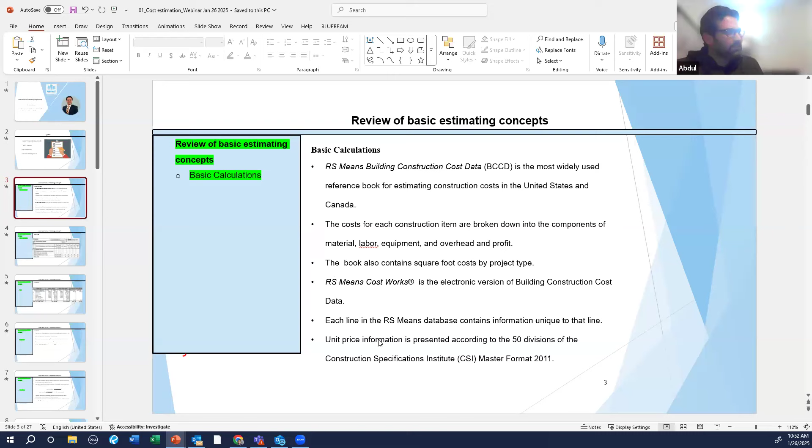All right, enough discussion on the references. So this is how it looks like. I have a reference picture, for example this is the concrete division. Concrete is mostly covered in Division 3 in the United States, so you see I have Division 3 up at the top. This is how RS Means looks like.

This column is called the crew, and I'll explain what a crew is in the next slide or so. This is the daily output, how much this crew can produce in one day - basically 15.62 cubic yards. If I use a crew C14A, it's going to give me 15.62 cubic yards per day. This is the labor hours, that's the unit, cubic yards.

That's the bare material, the minimum material per cubic yard. Bare material means you have the cost without any taxes, without any fringes or markups, just out of the shelf - like when you buy something in a grocery store, the shelf price is for example 10 rupees, but when you checkout and it adds sales tax, it costs you at least 12 rupees - those 2 rupees extra. So the bare cost is when there are no taxes, no markups, right off the shelf price. And the total price is after the markups, after the profit and everything.

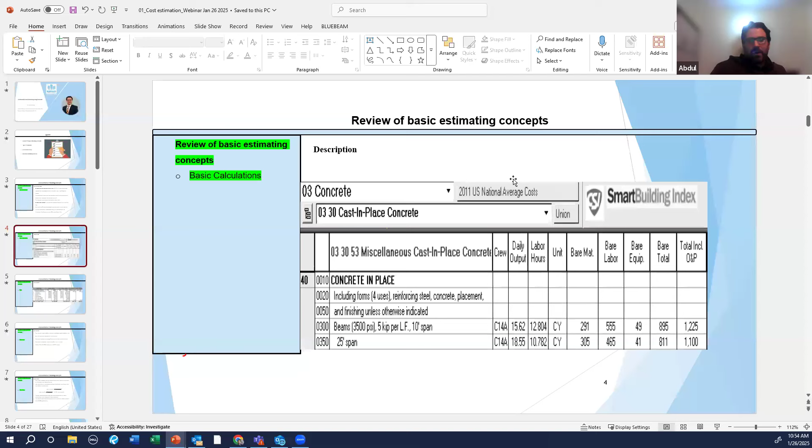Then this is the total cost including O&P. O&P means overhead cost and profit. So on every single item, the contractor is going to make profit from you, and that profit is sometimes in percentages - 10%, 15% - depending on what the contractor charges. But I just wanted to show you how RS Means looks like, this is just a picture.

So next slide, this is what I want to talk about. One of the most critical, one of the most difficult things to estimate in any cost estimation is the estimation of labor. It's not that easy, it's not straightforward. You have to do a lot of research, a lot of things before you can estimate how many hours a particular job would take. When we talk about construction labor hours, it's not the labor hour for one worker.

Usually there are a group of workers called the crew. So for example, if I have a concrete job that I have to do, miscellaneous concrete, pouring concrete somewhere, I'm not just gonna start estimating hours for one worker, then second worker, then third worker, then fourth worker. It doesn't work like that.

What that means is that if I have a concrete job, typically it would require a C14 crew. Every crew has its own combination of people. In this case, just for an example, the C14 crew has one carpenter foreman, 16 carpenters, then 4 rodmen, 2 laborers, 1 cement finisher, 1 equipment operator, 1 gas engine vibrator, and 1 concrete pump small.

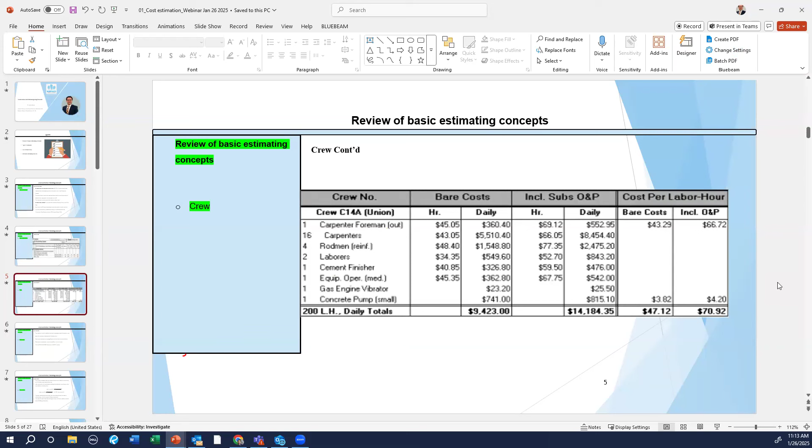Sharif, please go ahead. Yeah sir, my question - the duration, like 5 months, why do we need 5 months for this course? Most of the participants are engineers, they have the basic knowledge. So is the material itself 5 months worth?

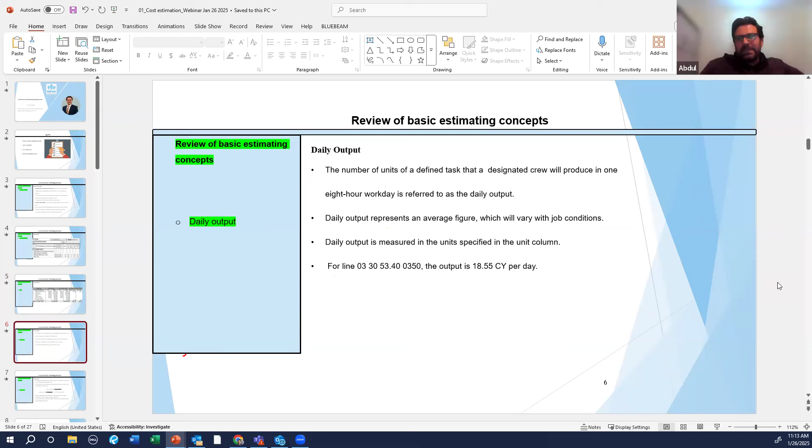Well, the material itself is a lot. Do you want to just scratch the surface, or go in depth of all the divisions? If you want to just scratch the surface, I can finish this course in 1 month, then you don't need 5 months. But one of you guys earlier asked me, are you going to cover MEP? If I have to do MEP, I have to literally teach the civil guys the mechanical and electrical systems before I can teach them estimation, right? Because it's not going to be easy for a civil guy to understand MEP estimation right away.

So I have to develop their foundation first. If I don't develop their foundation and just do the basics, it's not going to work - for example, I'm a civil engineer, I have a very strong background in civil engineering, but I am also a very, very good estimator of MEP divisions. But I did not learn it by just knowing the basics of MEP - I had to dig deep into MEP and learn it.

So if you want me to just scratch the surface, I can finish this course in 1 month, maybe less. But if we have to dig deep into estimation because you want to price the whole project - you don't just want to do parts and pieces, you want the whole project estimation - then it probably takes a long time. MEP alone would take me at least 2 months to bring a civil guy from a civil background into MEP estimation. So that's why, I guess, that's why.

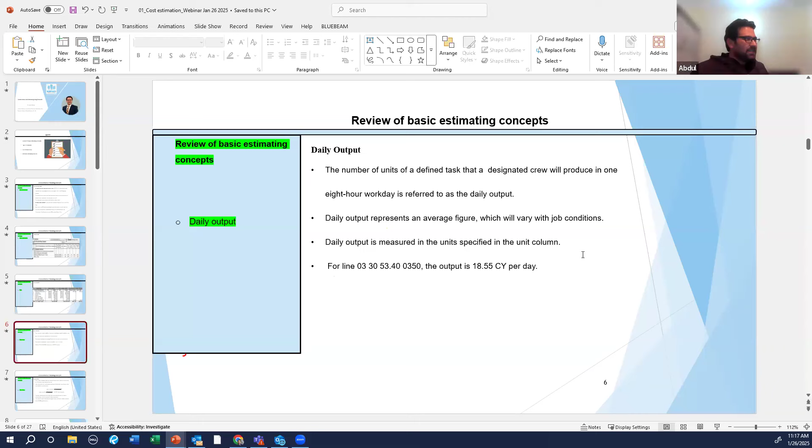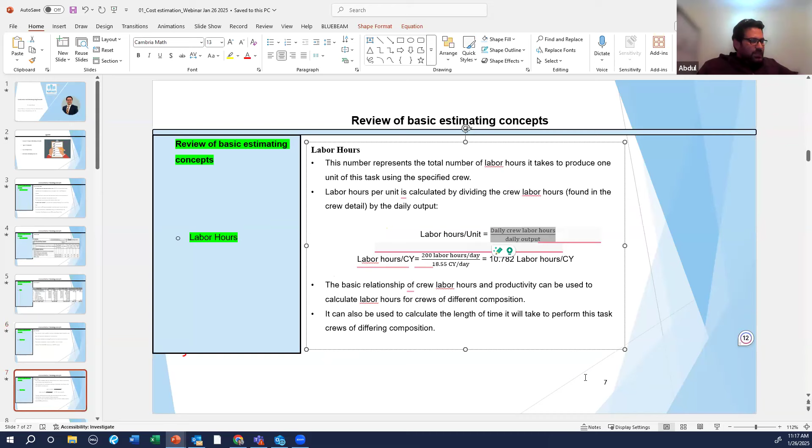And that's how you do the labor hours calculations. If you know the daily output, RS Means will tell you a rough daily output for a particular job. If you're doing miscellaneous concrete, cast in place concrete, or any type of concrete, it will tell you how much it will cost, how much it will produce per day. From there, you can basically calculate your number of hours per unit produced.

So this is a simple calculation. I can share the slides with you, but you can also download this from Google. I can share these slides. These are all simple calculations.

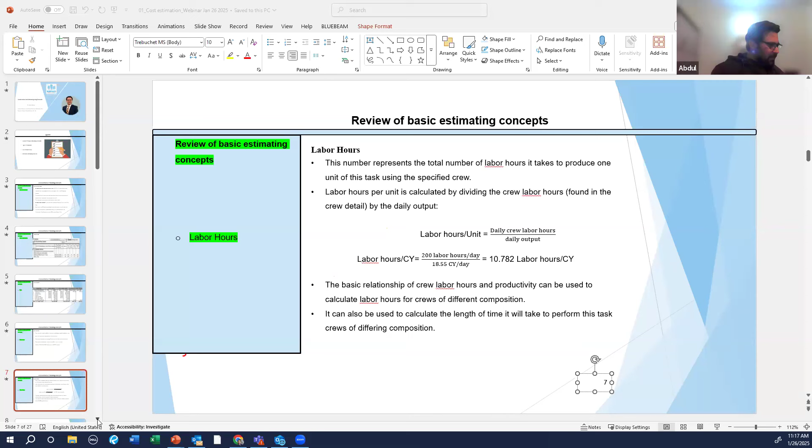Let's see next. All right, so the same example. Total overhead and profit. I think some of the slides we already talked about.

So we have the bare cost, which is any cost outside the markups. Markups are not included, sale taxes in case of material. In case of labor, no fringes, no benefits and all that. So those are all the bare costs. But when we add... Can we say the bare cost is the base price, the base cost?

So in case of material, what do you mean by base, by the way? Base is something that is fixed without profit. I have seen in some estimation, like for example, if you are doing PCC, they have written at the end in brackets 'base price'. Okay, yeah, it could be.

Yeah, it could be. The base price is basically the way I say it when I'm teaching is that it's the price on the shelf. So when you go to any grocery store and walk in, you see on the shelf it has a price on it. So you pick that up, right? For example, 20 rupees, 30 rupees. Then you gather all your shopping cart and take it to the checkout. When you do the checkout, it includes all the taxes and everything. So that shelf price is different than the checkout price, right?

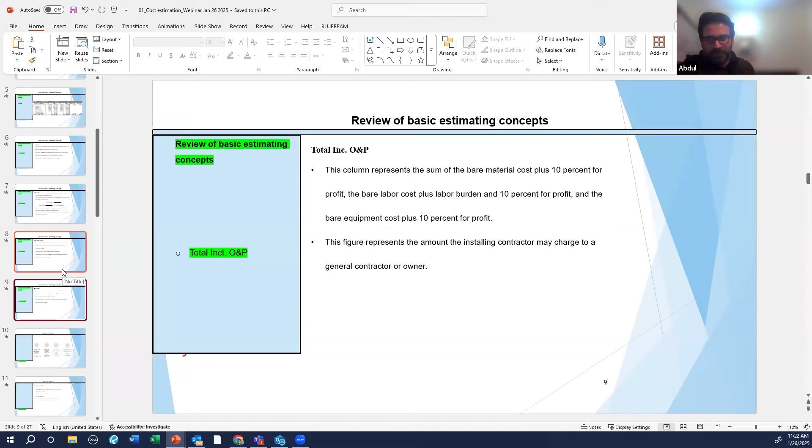All right, so I believe, Azam, this is the slide you wanted to see, right? The types of estimates, right? Yes sir, this is the right one. Typically the names might be different — these are the names we use in the United States industry, and I guess the names are similar elsewhere, but they might be slightly different from one another. That's why I've put an 'or' between those two statements, so at least you know one or the other.

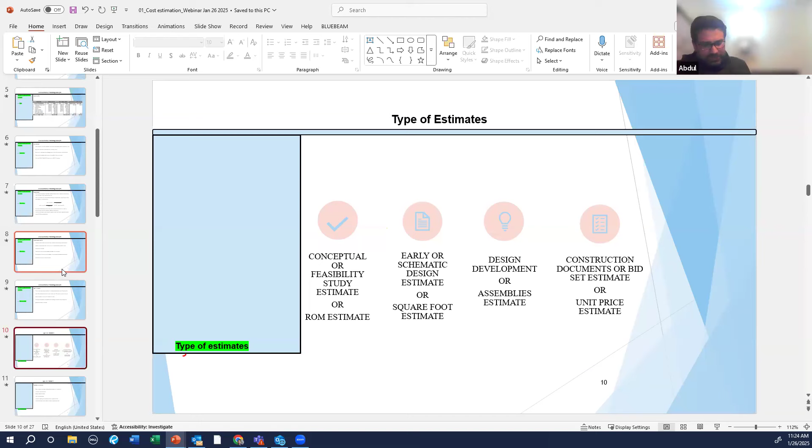So, conceptual or feasibility study estimate — that's the estimate used in a very, very early phase when we don't have a lot of information about the project. So we do an early phase estimate or feasibility study estimate. After that, once we pass the conceptual phase, the next steps are schematic, then design development, and then construction documents. I'll explain each one briefly so you know the difference between them.

When we talk about the conceptual estimate, that's the estimate where you have a lot of options. For example, you're trying to build a house. What's the first step? You're going to think about the community — which community should I buy a plot in first? Should I buy in DHA, should I buy in Bahria Town, or one of many other towns? So those are all your options, all your concepts. Then you say, okay, if I buy a plot in DHA it's going to cost me this much, if I buy in Bahria Town it's going to cost me this much, or if I buy in a third community, it's going to cost this much.

So at this point, the conceptual estimate, you don't have a lot of information. You're still figuring out where exactly you want to do the project and how. It doesn't necessarily have to be about location — it could be the same location, but you still don't know whether you want 5 stories, 2 stories, or 3. You're so divided, so confused at this point, but you want to do a project. That's where you do the conceptual estimate.

That's when you talk to a cost estimator, and with just the limited information he has, he doesn't know a lot, but he's reading your mind and writing down some statements, and based on that, he produces a rough estimate. That's why it's called a rough order of magnitude estimate, and that's why it's also called the feasibility estimate.

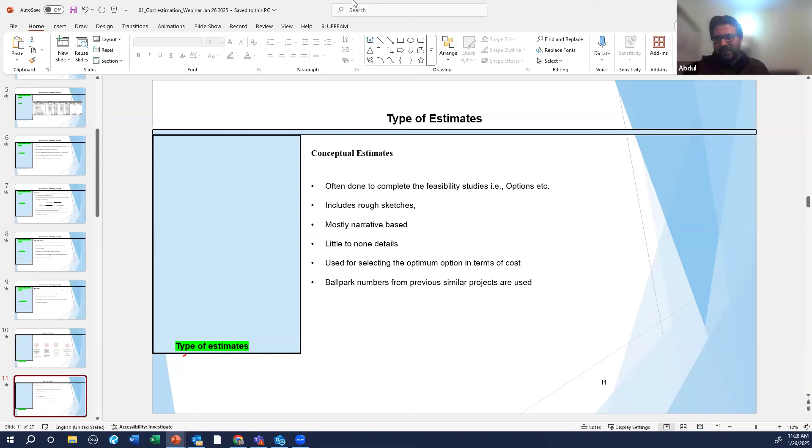So sometimes those ballpark numbers could be just one or two statements, because we don't have a lot of information. Based on your previous similar projects, you bring in that knowledge and produce your very, very early conceptual estimate.

This is a project I completed - a school project - when I talk about the different options. This was a client who came to me. I can't display the client information for copyright or privacy reasons, but this client told me he had three options. So the first option - this is an elementary school.

So that's one option, and he asked me to produce an estimate for it. Then he said, what if I divide it - do half of the renovation, not the entire building renovation. So you just do half of the renovation, and then for the other half, I'm building a new building right next to it.

So this is addition. When we are developing or building another building right next to an existing building, we call it the addition. Addition to an existing building.

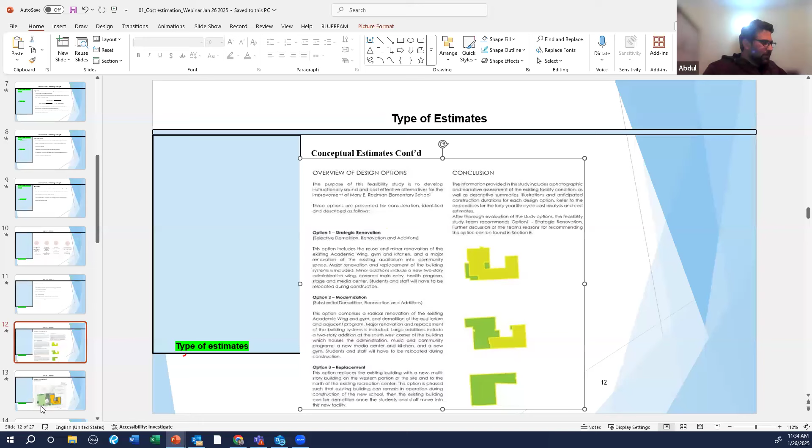All right, cool. So again, sometimes if the owner is kind enough, he'll probably give you rough sketches like this. He'll tell you, this is where I want to build the basketball court. Here's the name of the school. This is where I want to build the building pad. This is where I want the recessed play area, and so on.

So sometimes for a conceptual estimate, the owner might give you a sketch like this and ask you to estimate from it. But you got the idea of why conceptual estimates are equally important.

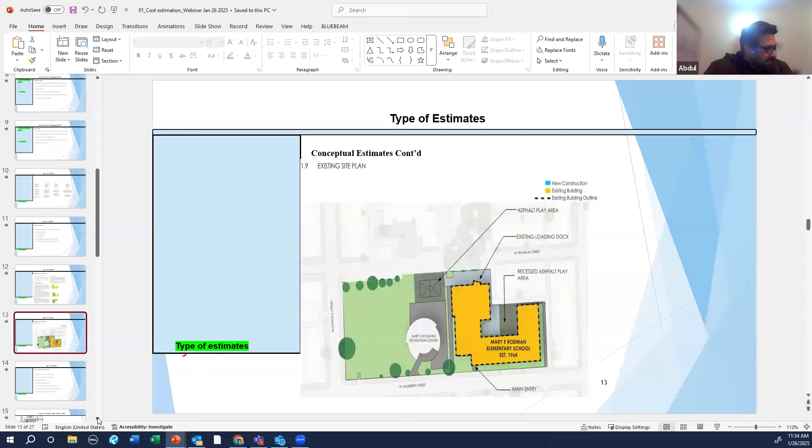Once you pass through the conceptual estimate, the feasibility estimate, or the decision-making estimate, the next step is the schematic design. Schematic design is where you have chosen your options. Remember, in the conceptual estimate we are looking for the best option for us. So that best option has already been chosen at this point. Now we are in the second phase.

In this schematic phase, the designer has already worked on the option the owner is pursuing. At this stage, the design is only 30 to 40% complete. And then the owner is asking you, can you give me another estimate? Now, why would it be important that the owner is asking for an estimate when the project is only 30 to 40% designed? Can anyone tell me why? Just like I talked to you about the importance of the conceptual estimate, what is the importance of the schematic design estimate at this stage?

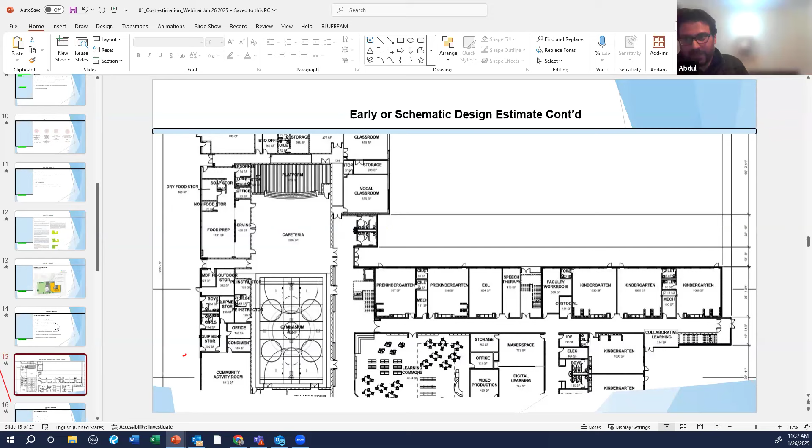Once we pass that stage, now we are into the DD stage, the design development. That's when you're almost close to completing the design. At this point, your design is basically 80 to 90% complete. The design team has worked extensively to produce that design, and the project is going towards completion. Some buildings, not all government projects, would require the DD estimate. Sometimes they just skip the DD and say, give me the final estimate, but some do require it because they can still do some alternates at this point.

For example, I was recently on a project that was in the CD phase, the step next to DD. All of a sudden I got a phone call from the owner saying he wanted the estimate of the project, but wanted to do an alternate on it. I asked what he meant, and he said in a certain area he had used very expensive light fixtures, and wanted to see the estimate with those expensive fixtures, and then another estimate replacing them with cheaper ones, to see how much he could save on those lights. So I gave him an estimate including the expensive fixtures, which I called the base estimate, telling him this was the total cost including those fixtures. Then I gave him another estimate where the expensive lighting was replaced with cheaper ones. He looked at both estimates, and there was only a difference of 1 million.

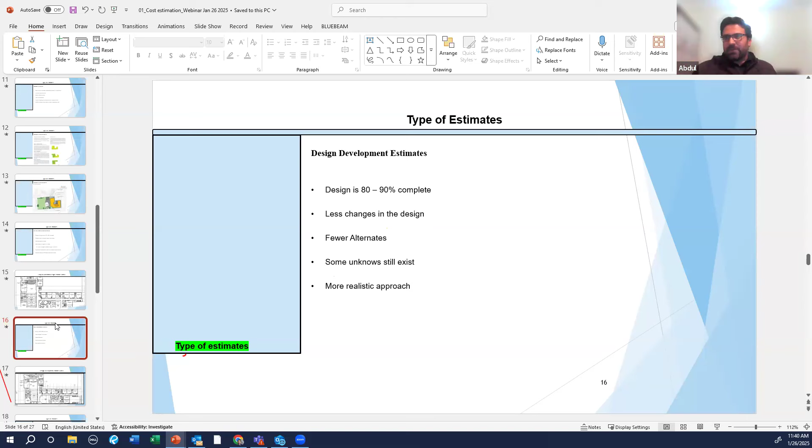Sir, this is also a DD type of question, a DD type of communication that you do with your owner. They might still do some alternates, so I put up that there are still alternates that can be done. The whole project cannot be redone at this point, but at least some sections can still be refined. In DD, the design is looking more complete, you have more dimensions given, more values shown on the drawings, but still that final push is left, like that 10%.

And then the final estimate is basically the CD estimate, the construction documents estimate. Complete—at this point the design is complete. Generally you only have tweaks here and there. The owner might just call you, hey, change this number, I don't want 100 light fixtures, I want 90 light fixtures. Very small things, but at this point your estimate is almost final.

This estimate is supposed to be between 2 to 3%. If you could bring this estimate and the actual cost of the project within a 3% delta, then you are considered a very good estimator. But if the owner sees a 15% delta with the actual construction cost, they're gonna come after you, because basically you misguided them. At this point you should be well educated and skilled enough to produce an estimate that is very close to the actual cost of the project.

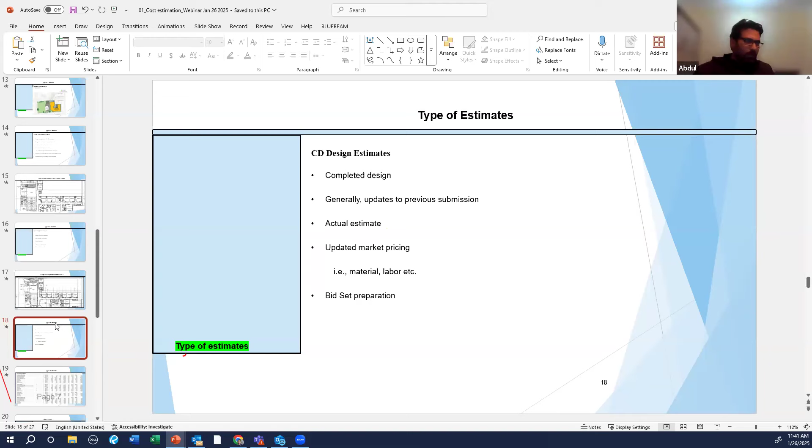So that's the CD estimate, right? It is the same thing like we do the feasibility design, then we prepare the preliminary design, then the detailed design, then we prepare the final issued for construction drawing. And with the passage of time, like feasibility, preliminary, detailed, then IFC, definitely the cost estimates are going more accurate.

After finalizing in Pakistan, what happens is we prepare these drawings—conceptual design, conceptual drawings, detailed design. When we get a roughly roundabout estimate, then we write it on the PC1 that is approved by the government. So exactly, that's the PC1 part I know.

In the US, the way it works is this estimate then goes to the permit set. The permit set is the drawing set that you use to get your permit—you submit that to the local jurisdiction, the local government, and then they issue you a permit. As a company we typically stop at the CD level, but I have seen once in a while the permit cost estimation comes through, where they say, now that we were applying for permits and the permit people mentioned a few changes here and there, based on those changes now produce an estimate that incorporates those changes. So sometimes we call that a permit estimate.

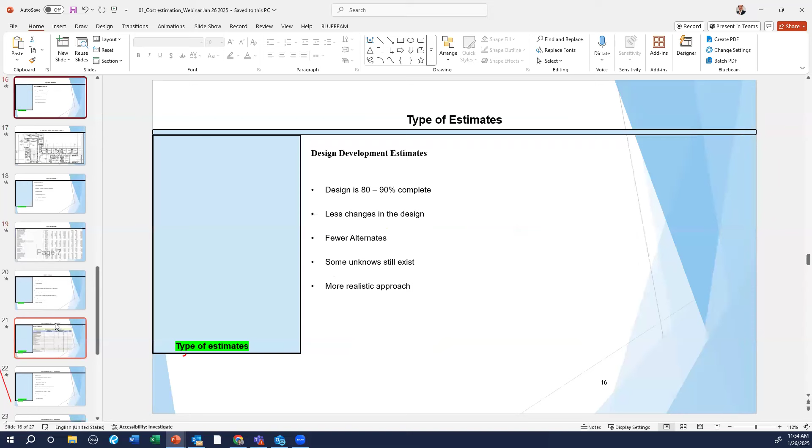Sir, I have a question. If we have designed 30 to 40% of a building and the estimate has been done, the designer wants to keep an eye on the budget.

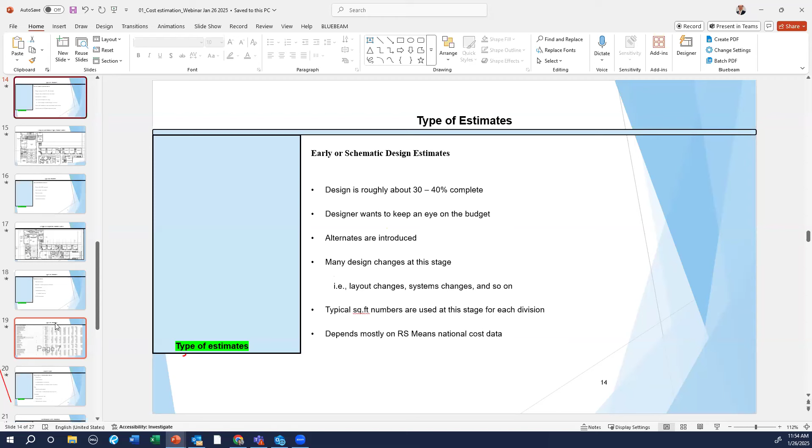Yes, that's the early schematic design estimate. When we estimate, the estimate was in line with the budget, but suddenly inflation occurs and material rates go high. So if we're estimating at 80 to 90% of the design, it doesn't match the budget the owner has to deliver. So what will be our step to handle this?

This is a very good question. When you do all of the line by line item estimation of quantities times the unit pricing and all that, towards the very end, we usually use a term called the escalation factor. Your estimate does not stop when you finish quantity times labor times material. Towards the very end, you start applying your markups.

One of the markups is for contingencies, because your design might have a lot of contingencies that are not visible on the drawings. For example, the geotechnical report shows that one foot down you have very good soil. But the geotechnical report is based only on bore holes in different locations, and from those you produce the report for the entire area.

But what if, when you start digging, your site has big rocks or you hit bedrock? You don't account for it because the geotechnical report didn't capture it. So those types of contingencies you keep in mind and typically cover with some percentage. Towards the end we apply many different markups, and one of them is contingencies.

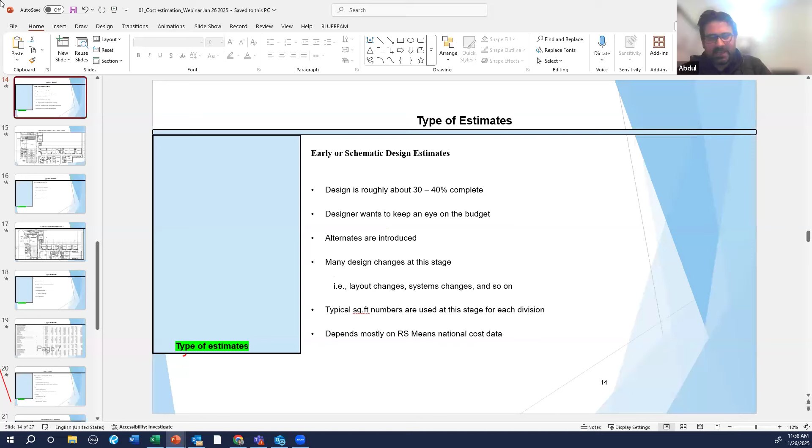Yes, it is clear. Okay, so we got to the last estimate, right — the CD estimate where everything has been laid out, everything. Oh, go ahead, someone has questions.

Sir, I have a question. I have seen at different sites — somewhere they add contingencies in each activity, at some sites they add it in control accounts, and sometimes also in planning accounts. So what is the exact point where we add contingencies in control?

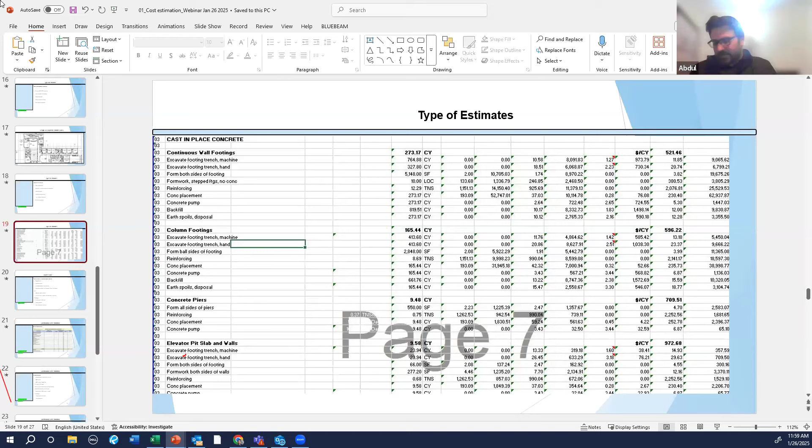That's a good question. For contingencies, I would typically take the total cost estimate and apply a percentage on top of that, because contingencies can basically be in any division — concrete, bricks, steel, site, you name it. So ideally, once you finish the total estimation, you add 2-3% of the total estimate into contingency. That can generally cover contingencies globally, not at one particular section like site or concrete. So I would rather do it as a whole, not division by division.

Right, okay. So then we come to the point where you guys are all interested in learning the software, how it's done, the estimates, right?

So we talked about so many types of estimates, why one is important, why the other one is too. So all that discussion has been done. Then it comes to the point of how it's done. It's done in so many different ways, right?

We have the traditional pen way, still very much effective, right? Still I use it. In this very modern world, we still use the paper pencil estimate, hard copy measurements, the benefits and the drawbacks.

You see them up there that it's still good for smaller projects, quick checks. Sometimes when I go out on the field and the owner grabs me from my shoulder and asks me for a quick estimate, at least as a cost engineer or cost professional, I should know all the mathematics behind all these computer programs.

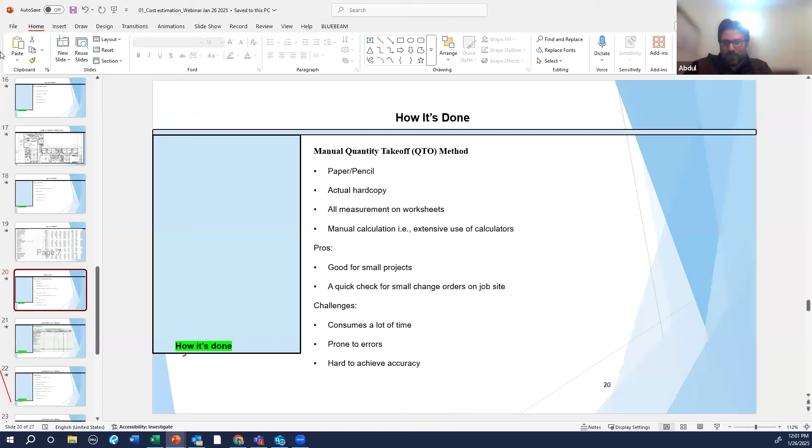Sometimes those softwares are not readily available for you, but you as a cost engineer or cost professional should know all the calculations behind that software so you can run some quick calculations quickly. So that's one way of doing it.

Again, it's a very traditional, very manual thing, still very much effective for small projects. Of course, you cannot do a huge project estimate based on just counting it by pen and pencil when you are doing, for example, a 30 story or 40 story building, right?

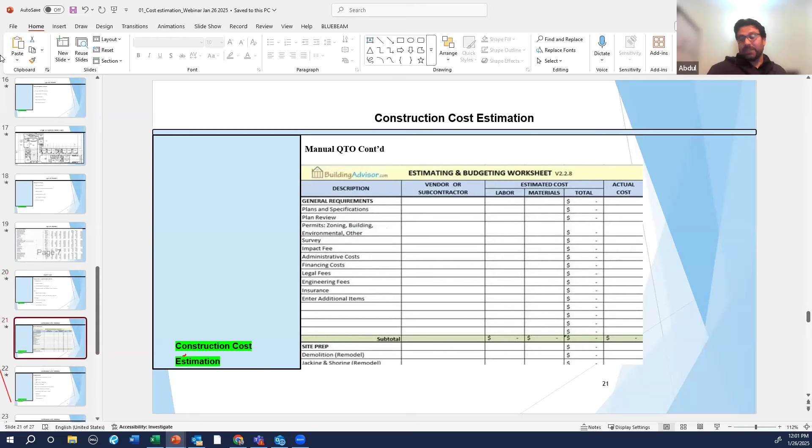Of course, then you would use your PlanSwift or the other 2D softwares. Then we have the 2D quantity takeoffs. I have also written a couple of research papers on this 2D as well.

So 2D is where you have software like, for example, PlanSwift. The on-screen takeoff software is very similar to this PlanSwift. I use both, but they are very similar. I don't know if you can download PlanSwift for free, but I think I've heard that you can do a crack version of it.

But PlanSwift typically gives you a 2 week free trial when you send them an email. I'm sure a lot of people here have some sort of crack version that they can download. So PlanSwift is a 2D software.

It basically takes your PDF, uploads it, you just change the scale, and then you start counting your items. It's very, very easy, user friendly. You don't need specialized training for that. You'll learn that in less than a week.

And that's why it's more convenient. You can easily export items into Excel. You can easily download your takeoffs into PDFs and all that. So it's also very compatible with Microsoft suites as well.

Some of the challenges are that sometimes the view is hidden. You don't see a good view because it's all 2D - it's just like as if you are looking at an actual drawing. So some of the views are hidden. That's one of the drawbacks of this estimate.

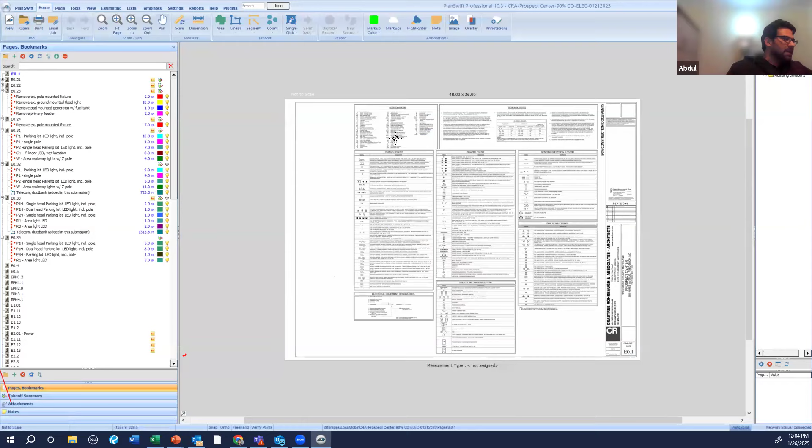So basically this is the PlanSwift software. It's very easy - you can open any project, make all the folders. This is the PDF that you upload. All you have to do is just...

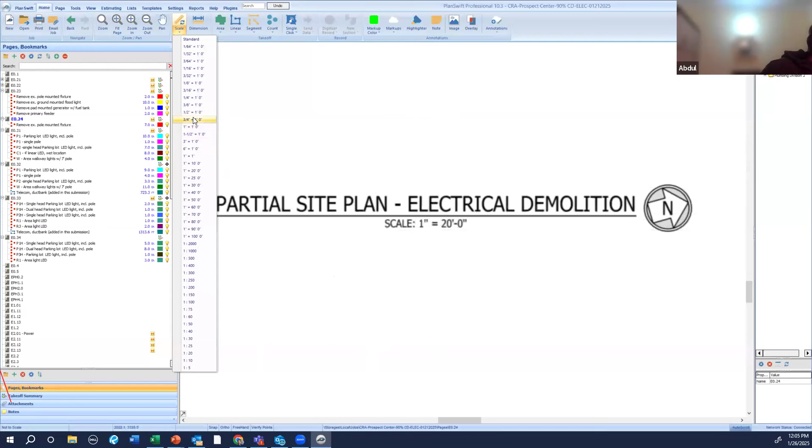Change the scale. For example, this is the cover sheet, so each sheet will have a scale of 1:20. I come here, choose my right scale. The scale should be according to the design scale. Yes, this is the actual design scale, so you just choose your scale.

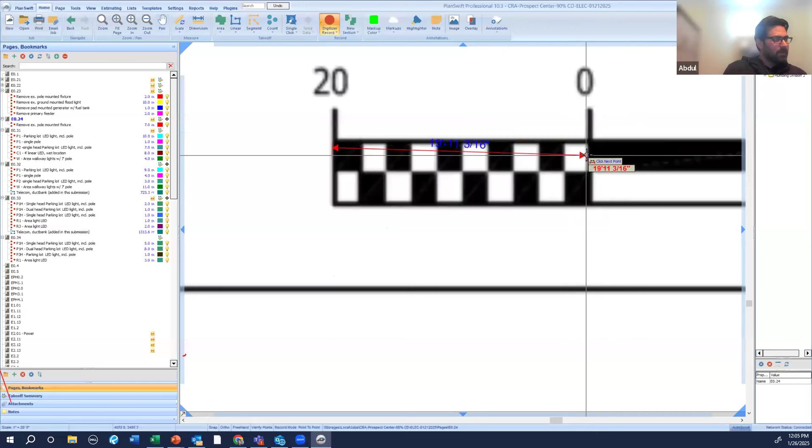Once you scale it, you see this is a check. Usually the drawings will have these check marks so you can check whether your scale is correct or not. For example, this should be my 10, 20 feet line - you see, this is 20 feet almost, so this is good. So from the PDF, it just incorporates the scale very easily.

And from there you start counting. For example, this was a site I was doing, and I'm counting the site lighting. As you are counting, it's basically counting the totals. If I click on this one, it tells me where it is at. This is the 24, the same type I have 24 and all that.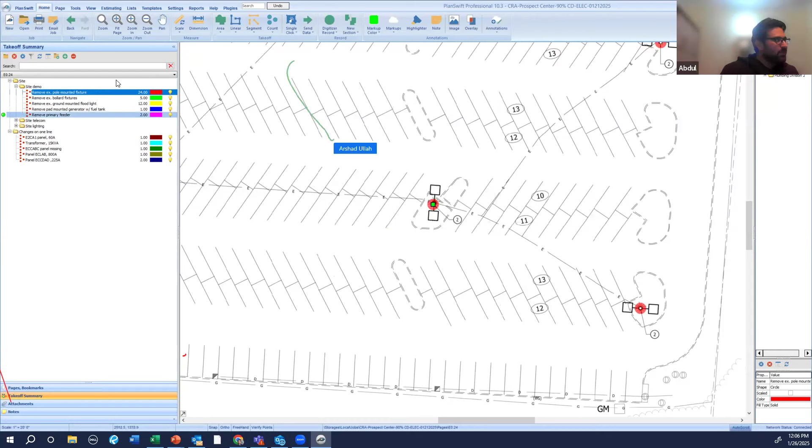So it's very easy. We'll be learning about PlanSwift throughout the course. But I just wanted to show you how it looks like.

Sir, we can also calculate the estimation through Revit, and we can also calculate the estimation through Navisworks. Yes, we can do that. Those are your quantity takeoffs. Yes, you can do that.

But like I earlier mentioned, in Revit, if you have to do the quantities, it's good for some of the divisions. For example, it's good for your interior partitions, interior floor areas - you can right away get your areas with just a few clicks. But if I have to use Revit for something like underground piping versus above ground piping, Revit does not tell me which one is underground, which one is above ground. It will just tell me this is 4-inch piping.

And like I mentioned earlier, sometimes my below grade piping would cost me more because there is a cost for the excavation included as well. So I have to keep those quantities separate, even if the pipe material is all the same, because for those below ground quantities I still have to add the excavation factor. For the above grade, I don't have to. For the below grade, I do. So those type of delineations, sometimes Revit will have limitations.

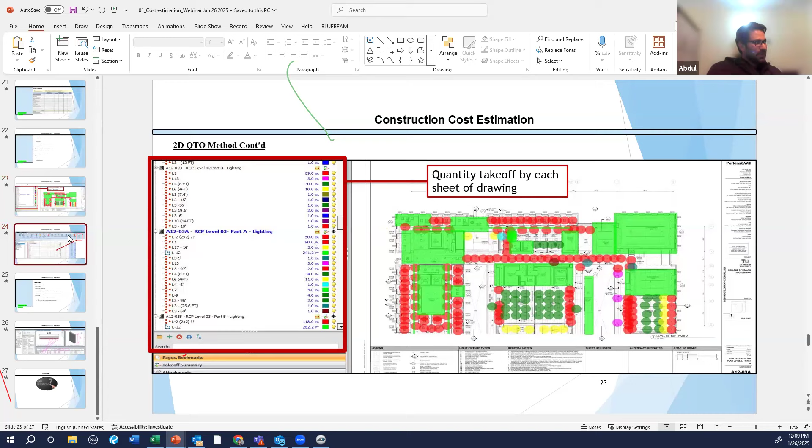This next type, you see, I can easily export that to Excel, and from there I can do all my estimation with it.

So it's very easy. Then there's BIM-based quantity takeoffs, basically where, for construction cost estimation, Revit and Navisworks are the software you can use. They are very highly accurate, plus they can do your work in less time.

One of the limitations is that some smaller companies might not have enough resources, training resources, or enough manpower to do BIM, because it's a specialized software. You would need specialized training for it to do the cost estimation. Also, it's still not implemented everywhere.

Some bigger, more sophisticated companies will have it. Like in my company, we use Revit as well for architectural estimation, but some people might still not use it.

So you want to be flexible with who you communicate with. Some companies, if they don't have Revit and you're only using Revit, then you're not going to be able to communicate with that company, because sometimes you bring on board subcontractors in your estimate. For example, when I started with this current company, we typically did not have a MEP team before, so we had to always sub out that work.

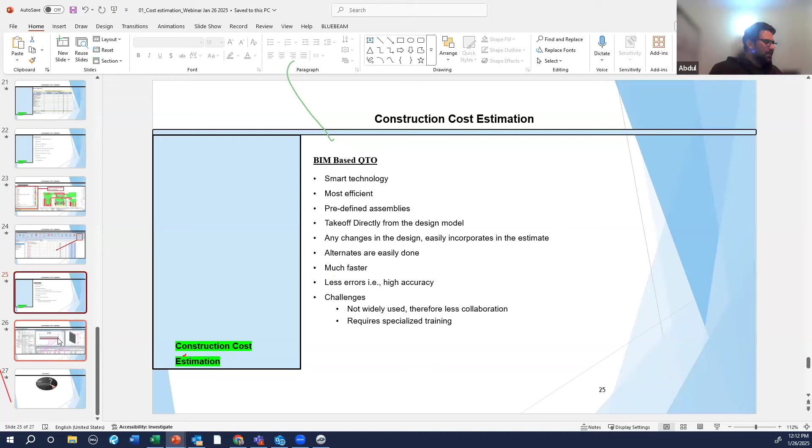So, 3D — you guys are all familiar with Revit. Revit can produce model estimation very quickly. In a matter of a few clicks, it incorporates all your quantities from the model into an Excel spreadsheet. Like I mentioned, it is very beneficial for some divisions — concrete is one, steel is another, finishes, interior partitions, even the building exterior, the building envelope, the glass, and those types of things.

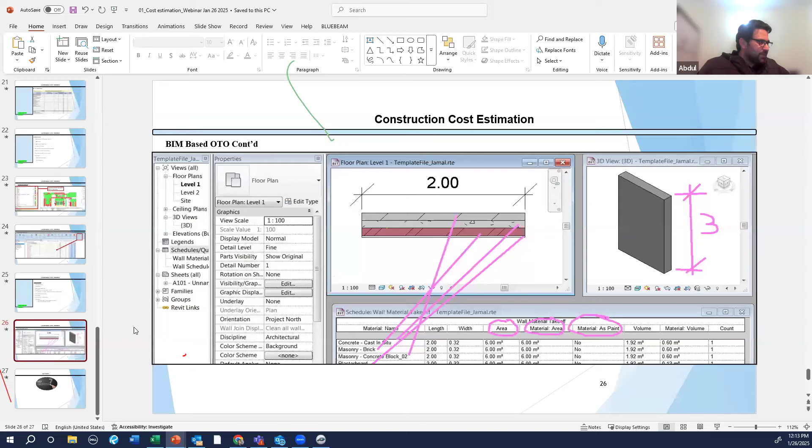But again, we need to make sure we're communicating effectively with our stakeholders and what they use, and based on those choices we can use the appropriate one for our own purposes. So those are the BIM ones, and I think that's my last slide.